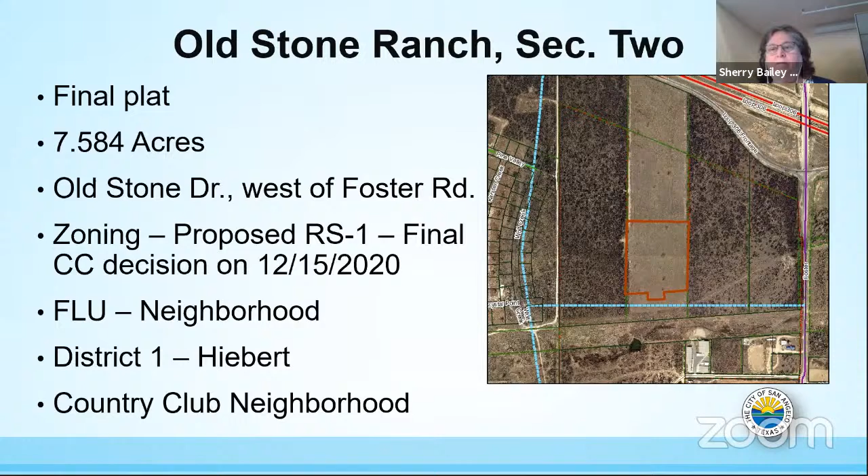There are 12 new lots that are being proposed along this section of Old Stone Drive. They are half-acre lots, and there are no variances being requested. The only discussion item that staff is aware of is the fact that what is being proposed is Old Stone Drive ending in a hammerhead.

In looking at the rationale for approval, the neighborhood designated in the comprehensive plan supports the single-family RS1 zoning which is proposed. The conformity with the intent and purpose statements: this provides the orderly, safe, and efficient development within the city. It also provides streets that ensure safe, convenient, and functional systems, and drainage access and utility easements are being provided. Staff is recommending approval of Old Stone Ranch Section 2 with 8 conditions of approval.

The first condition is a copy of the tax certification. Second, submit plans and construction improvements for Crystal Point Drive, or submit a financial guarantee or obtain a variance. Third, revise the plat to show the 60-foot right-of-way for Crystal Point for the entire length of the property, as it is a collector.

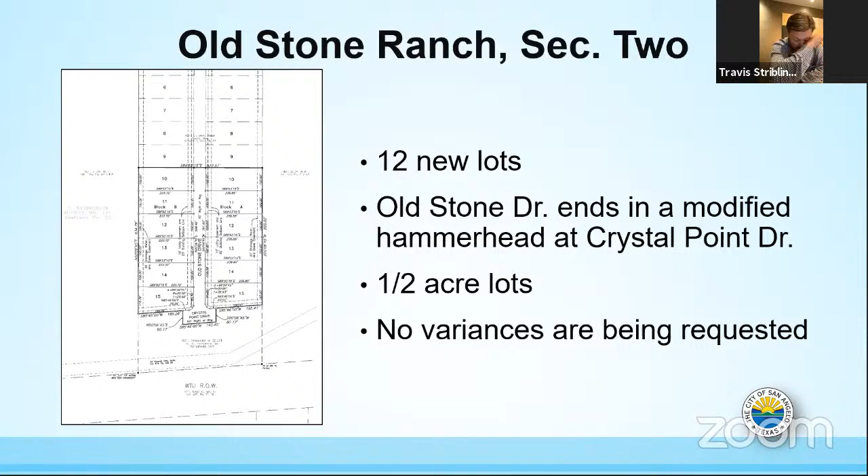I'm assuming if staff's recommending approval, the fire marshal has signed off on this hammerhead plat as it's been laid out. Is that correct? That is correct, and I believe the fire marshal is on as well if he has any additional comments.

Mitchell, have y'all discussed the option of a developer's agreement for the remaining Crystal Point? We have, and Public Works was hesitant to accept a developer's agreement in this case of right-of-way dedication and paving with no financial guarantee or backing, such as a bond, cash, or letter of credit. Normally that's stuff we'd see on a performance agreement. We were hesitant to accept it in this instance.

This is Shane Kelly, operations for the city. Another issue I have is I don't want to end up with another Twin Mountain Drive, where a section has been left out for years and years, and it's just a little bump out that actually starts causing safety issues in the roadway. That's why I had to go in there and temporarily construct a portion of Twin Mountain Drive, to clean up some of the safety issues involved.

It all depends on how soon things develop along Crystal Point Drive. But if this isn't dedicated and that half's not dedicated, you could end up with 2 chunks of Crystal Point coming together. So again, just another situation where we don't want to end up like Twin Mountain was for years out there.

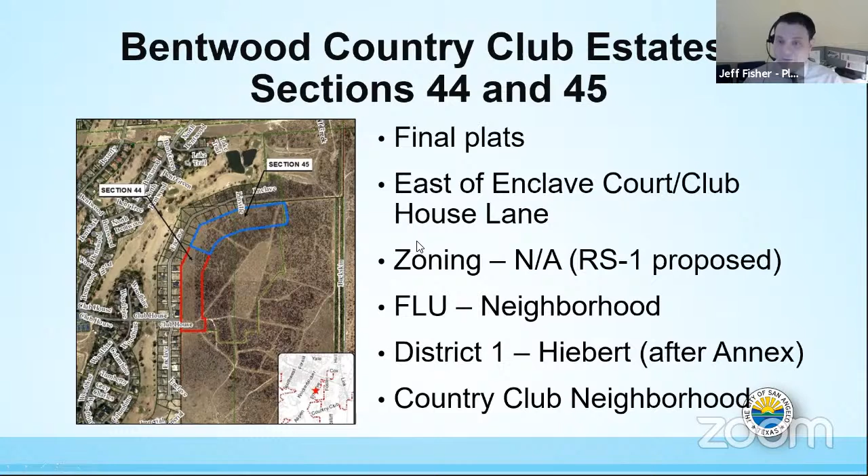This was part of the annexation item and rezoning that y'all looked at last month. So the zoning will be RS1 by tomorrow if everything goes well, and the future land use is neighborhood, District 1, Tommy Hiebert Country Club. This was the approved preliminary plat back in October. The areas we're talking about today, the two final plats, were the RS1 zoned areas to be annexed. So somewhere down the road, this remaining 49 acres will also be annexed, but not yet. So 44 is 8.051 acres, 33 single family lots, and 45 is 9.595 acres.

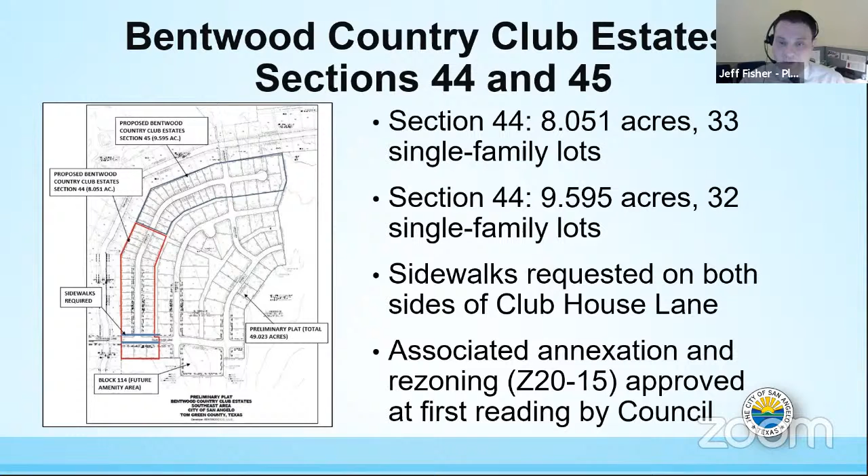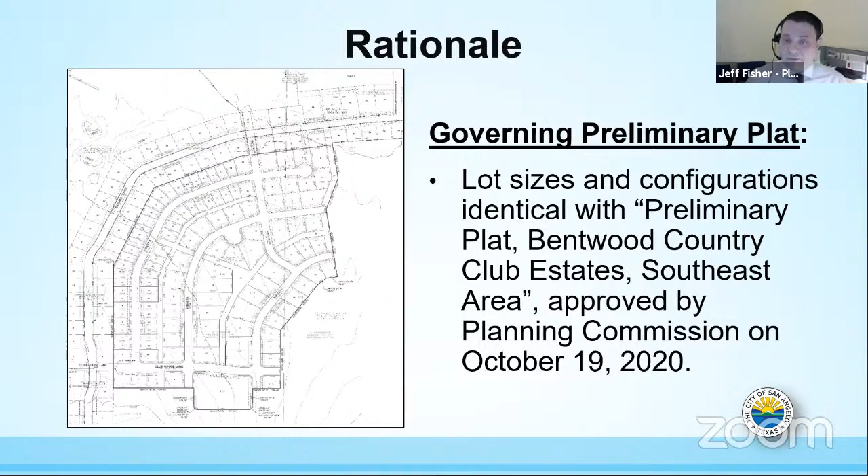I'll go over this quickly. The governing preliminary plat you all approved in October. The two final plats are the same lot size, identical with the preliminary plat, so it conforms.

The neighborhood policies support a diversity and mix of housing choices. These lots will range from 7,200 to 14,300 in that ballpark. So the lower end, some of the lots, will provide some options there, and then some of the larger lots.

As you go east, the new streets will meet the minimum construction standards. Clubhouse, as mentioned, is a collector, so that'll have a 50-foot paving width and a 60-foot right-of-way, and the other local streets will be 40 feet with a 50-foot right-of-way.

We've talked about this before as well with the preliminary plat. There could be a potential future amenity area here. So there's several reasons why we would want the sidewalks.

And again, this is just about 300 feet. So the dark red straight line is what's part of this plat. And then the dotted lines could be the future sidewalk extensions in the future. This could be an amenity area down here and just with more homes and people walking.

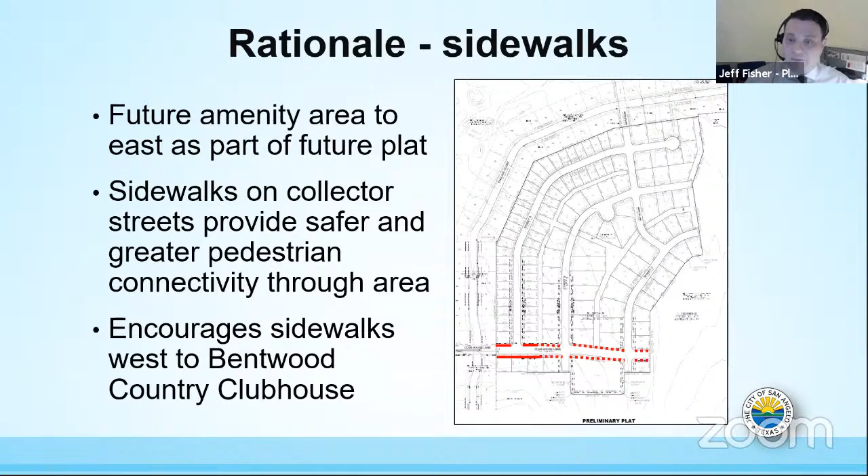We believe that with collector streets, having sidewalks is a good idea and will provide more pedestrian connectivity through the area. We've done this in previous plats. It also encourages more sidewalks in these dotted areas or in other places in the neighborhood.

Staff recommends approval of Bentwood Country Club Estates Section 44, subject to 9 conditions of approval, and approval of Bentwood Country Club Estates Section 45, subject to 8 conditions of approval.

I'll go over these quickly. For 44: tax certificate, and signatures of the preliminary plat. Some of those lettered lots on there were incorrect, and so basically some of the areas in the back that look like alleys might be used also as drainage features, so just label those.

The drainage study is required. Install water mains, sewer mains, and prepare and submit plans for Clubhouse Lane or variance. Prepare and submit plans for Riviera Lane or variance, and install the fire hydrants.

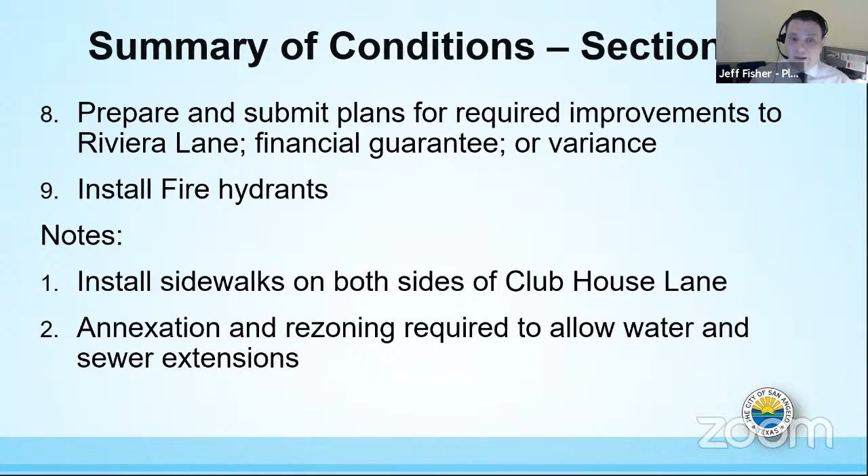A couple notes, we mentioned about the sidewalks on both sides of Clubhouse and the annexation and rezoning, which are going to second reading tomorrow.

And then for 45, it's mostly the same, except that those are not collector streets, so we're not asking for sidewalks there. So it'll just be the 8 conditions: tax certificate, signatures of preliminary plat, drainage study, water and sewer mains, provide and submit plans for Linville Lane, Riviera Lane, and fire hydrants.

So that concludes staff's presentation. I'm going to stop sharing my screen now, and if there's any questions or comments, please go ahead. Anyone have questions for the staff?

All right, I'm going to open it up for public comment. If you wish to speak on this case, please state your name. Hey, good morning, Russell with SKG.

We're not in opposition to really any of the conditions of approval, with the exception of the sidewalks on 2 sides of Clubhouse Lane. The sidewalk issue has been evolving. We've been there, and we don't have sidewalks in Bentwood now.

With some of these last plats, we do have a sidewalk coming down one side of Wolf Creek. We've kind of settled to that. Bentwood is a golf course community. They're primarily the mode of transportation. Yeah, there is some walking, but a lot of people use golf carts.

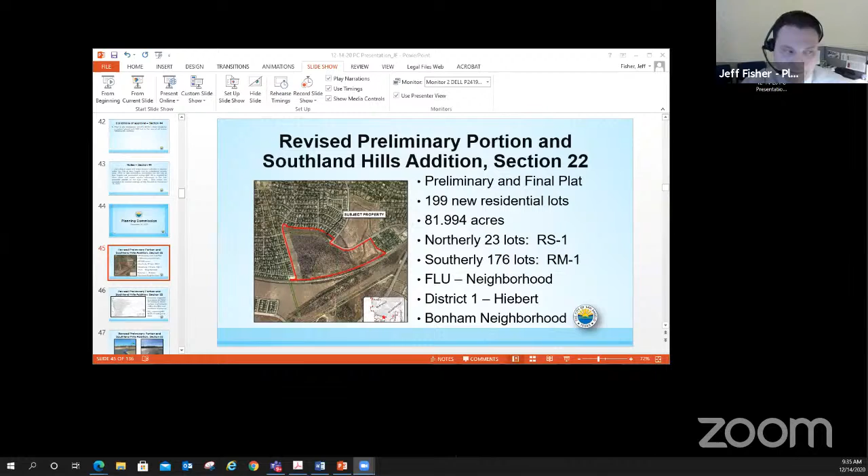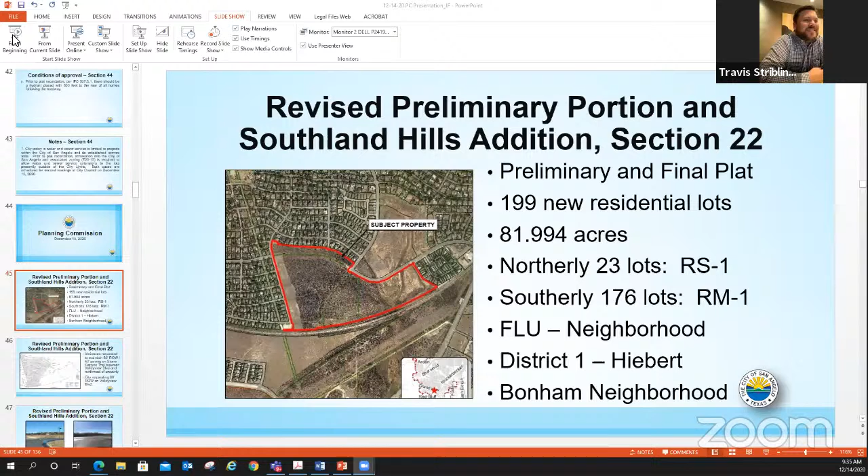Bear with me one moment, I'm going to share my screen again. There's pluses and minuses to having multiple screens. There it is. Okay, here we go.

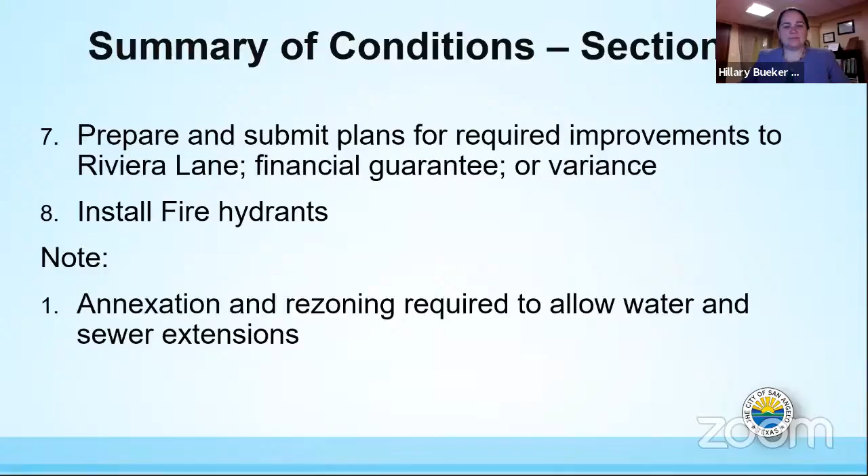Okay, so next case, and again we're going to combine them, y'all. This is a revised preliminary plat and a final plat for Southland Hills Addition, section 22. So the preliminary plat and the final are both for the same area. It's 199. Jeff, hold on. Travis, did you read the preliminary and the final? Go ahead. I'm not sure if I did. I'm so sorry, I didn't want to interrupt.

Yes, okay. Southland Hills Addition, section 22, a request for approval of a final plat, Southland Hills Addition, section 22, being 81.994 acres located east of Stone Canyon Trail and Valleyview Boulevard, and a variance from chapter 10.3A.1 of the Land Development and Subdivision Ordinance to maintain a right-of-way of 50 feet in lieu of the required 60 feet. And a variance from chapter 10.3A.2 to maintain a paving width of 40 feet in lieu of the required 50 feet for the portion of Stone Canyon Trail that is an urban collector street between the northwest corner of the property and Valleyview Boulevard.

Okay. Thank you, Chair Stripling.

The preliminary and final plats are both for 199 new residential lots across a large area of 81.994 acres. The northerly 23 lots, basically north of Valley View, are RS1 lots, so those will be single family.

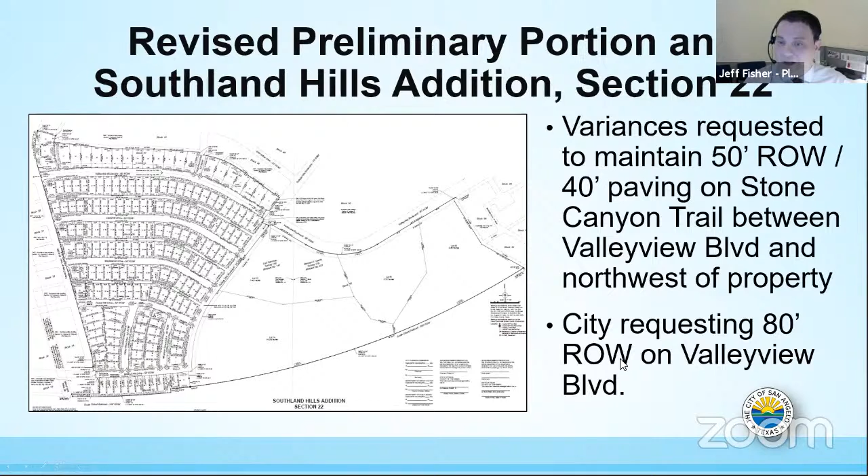A couple of variances were requested. There's a small piece of Stone Canyon shown as a collector street, even though it serves and always has served as a local road. So they requested a variance to allow this to remain at the local street construction standard from here to here: a right-of-way variance to maintain 50 feet and a paving variance to maintain 40 feet. The city is requesting an 80-foot right-of-way on Valleyview Boulevard here, and I'll explain that more in a minute.

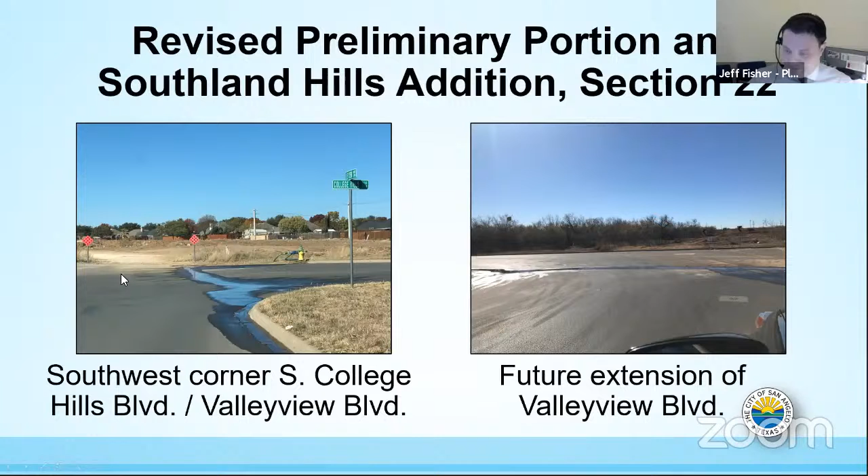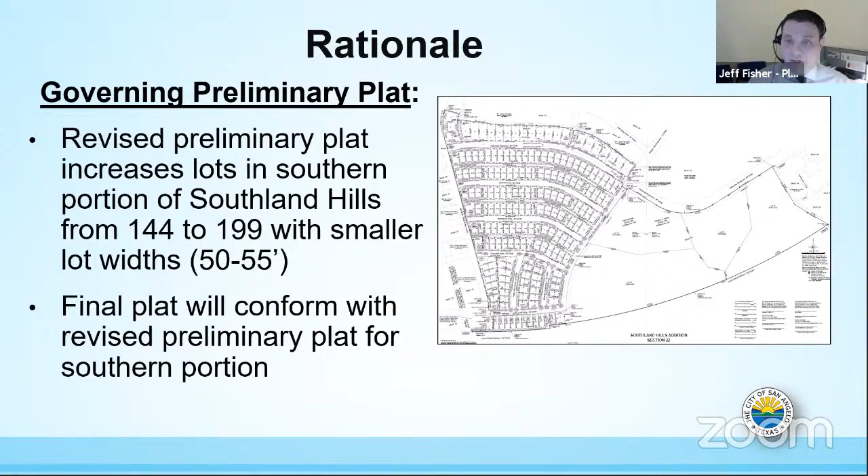Originally I counted 144 lots. These will be 199 lots with narrower lot widths of 50 to 55. The new preliminary plat and the final will conform with that.

The plats conform with the neighborhood policies to support a mix of housing choices, and the new street right-of-ways and paving will comply with construction standards. There's a lot of internal streets. Obviously this is a very big plat, but all the street standards will comply, with the exception of the variance.

Let's look at the 80-foot right-of-way first on Valleyview and why that's being required. You may have noticed in your staff report that it's designated in our thoroughfare plan as a collector street, so technically it only needs 60 feet. However, it's 80 feet to the west and 80 feet to the east, and I believe it's paved on one side to 80 feet already, so we are not asking for more paving, just the additional right-of-way.

That is something we discussed collectively with operations and engineering, and this would help operations for further maintenance of that right-of-way if they ever need to get in there, and also if the city down the road ever needs to widen that street in the future, we'd be able to do that. There's a section in chapter 10.3 of the subdivision ordinance that gives us the authority in those cases even if it's designated as a collector, and again, that's up to y'all.

Secondly, on the sidewalks on Valleyview, similar to the previous case, we believe that's a collector street. This is a really large subdivision with 199 lots, so having some sidewalks there would allow more pedestrian connectivity in the area, and again our standard policy is to have them on both sides.

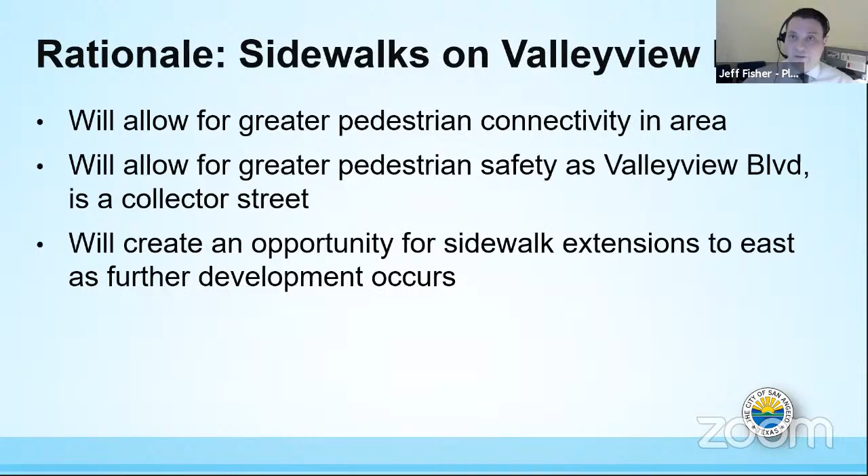When you hit College Hills to the east, the subdivision plat boundary is only on the south end as you go east of College Hills. So it's on both sides of Valleyview, and then east of College Hills, just on the south side, the portion that's abutting the plat.

We're definitely in support of the variance on Stone Canyon Trail. I went back over and looked at previous phases of all the subdivisions going back to 1978 and onward. It was constructed as a local road. The thoroughfare plan came in years later and wanted it to be a collector, but that area really serves as a local road, and it would require them to rip up the curb and gutter. So we are in support of the variance for Stone Canyon for that piece to stay at 50 feet. That makes sense because as you go further down in the subdivision, it stays as a local road—it's only that one section that was a collector. So we're in support of that variance.

Staff recommends approval of the revised preliminary portion, Southland Hills Addition, subject to 3 conditions of approval. Approval of Southland Hills Addition Section 22, the final plat. Approval of a variance to maintain 50 feet right-of-way for Stone Canyon, 40 feet of paving width for Stone Canyon, subject to 19 conditions of approval. I'll go over these as quick as I can.

Preliminary plat: revise the plat name, that's just to be consistent with the original approved plat and to show some differentiation. Again, minor thing, we can work with the applicant. Revise the plat for 80 feet of right-of-way on Valleyview Boulevard—that's if you all want to support that decision or not—and install fire hydrants.

And then the final plat: tax certificate, obtain the signatures on the preliminary plat first, which they'll do, obtain approval of a right-of-way abandonment. And that's, again, the plat was based on a 60-foot right-of-way, so if we change that, then that condition might change.

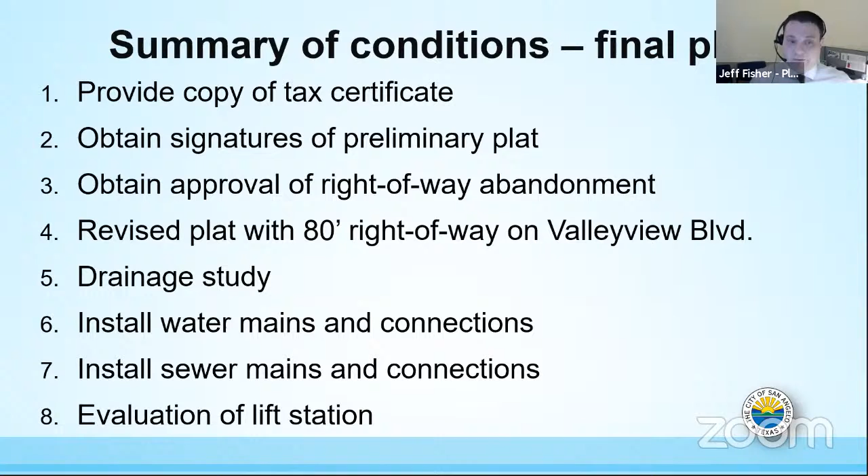Revise the plat with the 80-foot right-of-way, a drainage study, water and sewer mains, an evaluation of a lift station—engineering can comment more on that if needed—and then prepare and submit plans for all of the streets. I'm not going to go over all of these conditions, just know that with the exception of Valleyview and that portion of Stone Canyon, all of them are going to be local streets. They're going to construct them at, I'm assuming, 40 feet and not going to require a variance on those.

Okay, so I'm going to stop sharing my screen, and that concludes our presentation.

Anyone have questions for the staff? All right, I'm going to open it up for public comment.

This is Erica Carter with Carter Centris Engineering. I have Blake Whitley here and Lance Lacey. We have no issue with what was presented other than the 80 feet of right-of-way in lieu of the 60 feet. So I'm going to let Blake and Lance take over and give their spiel.

Blake? Are you there, Blake? I see Blake's name, Erica, but did Blake have a phone number as well? Was he calling in like you did? I don't know. Lance, are you there? Oh, good grief—I'm just unmuted. Okay, Lance, why don't you go while I try to get a hold of Blake?

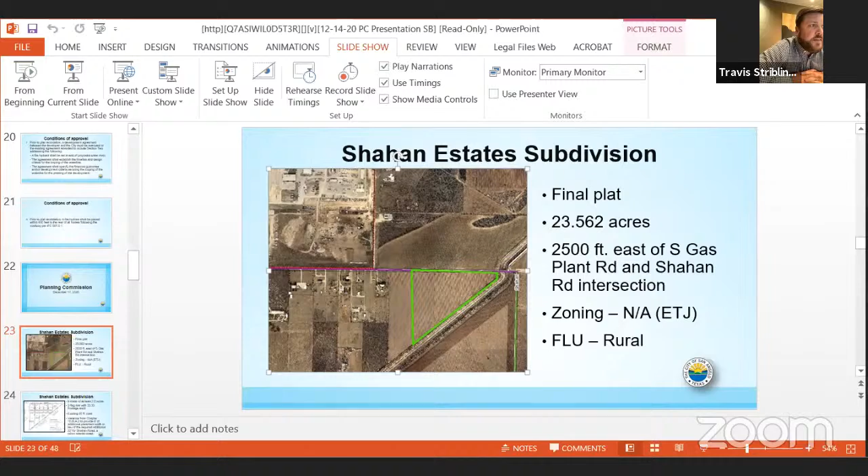All right, final plat for Shahan Estate subdivision, a request for approval of a final plat for Shahan Estate subdivision, being 23.562 acres located 2,500 feet east of the intersection of South Gas Plant Road and Shahan Road, and a variance from Chapter 10.3A2 of the Land Development Subdivision Ordinance to provide 6 feet pavement width in lieu of the required 22 feet for Shahan Road, a minor arterial street.

Okay, this is Hillary Bueker, Principal Planner once again. I've lost my PowerPoint, so I ask that you bear with me for just a minute. No problem. I totally lost it.

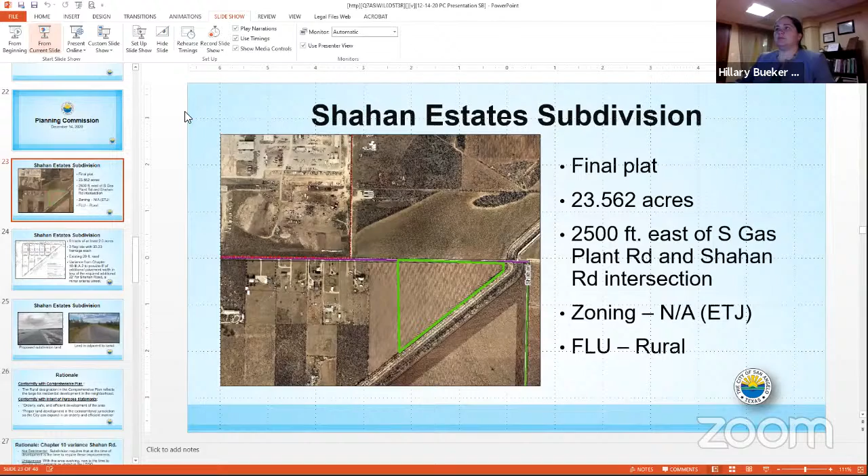I'm going to start. So this is a final plat of approximately 23, a little over 23 and a half acres. We are about 2,500 feet east of Gas Plant Road and Shahan Road, which would be kind of off your image to the left here. The zoning is actually not applicable since we are in the ETJ.

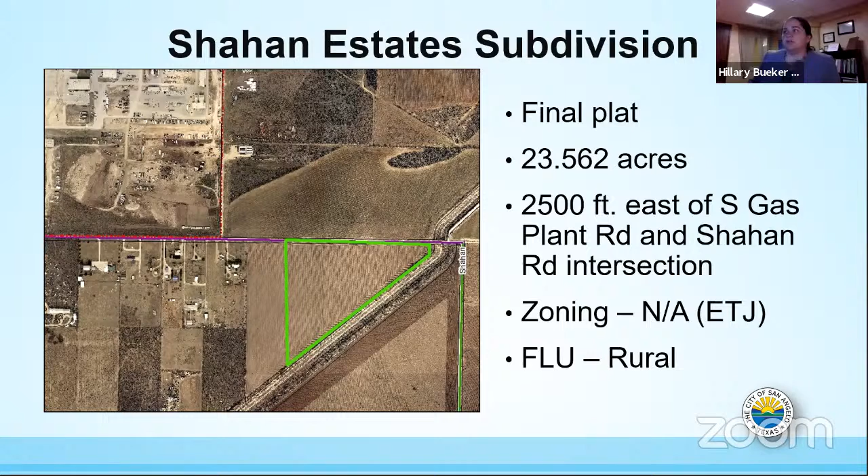If you see this red dashed line along here, that is the current city limit line. So we're not too far off, but we are in the ETJ, and the current future land use is designated as rural. Shahan Estates, I think all of them are over 2 acres, but they're larger lots in the ETJ. So we're looking at 9 lots of at least 2 acres. We have 3 flag lots, and each of the flags have at least 33 feet on the frontage.

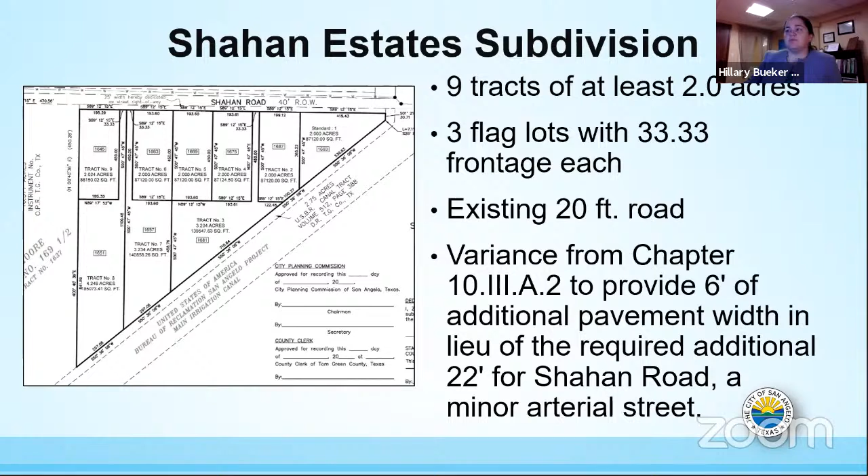There is the existing 25 or 20-foot paved section of Shahan Road. They're asking for a variance from the paving width. Shahan Road is actually designated as an arterial, which would require a 64-foot paving width. Currently, with it being 20, they would be required half of the 44, which would be 22. So they are asking to pave 6 foot, making it a minimum 26-foot wide road in lieu of the required 22 feet for the arterial.

So with chapter 10, staff is not supporting the variance. We're going to go through some of this. Again, we are basing this decision off of the current ordinance, and the ordinance states that any development is required to pave half of the incremental width. So the subdivision ordinance does say at the time of platting, that's when the roadway improvements are triggered. Staff does understand this is a pretty large section being 22 feet, but again, the subdivision ordinance triggers this with the plat.

With this area evolving, we're not sure that this isn't the time to get these improvements. We don't know if this will spur future development, and allowing the variance now might prohibit that arterial from developing in the future. We see no current hardship. There's no topographic issues. The master thoroughfare plan states this is a future arterial, so that's what we're basing it off of. And each home might not create significant traffic, but as this area develops out, this road may be needed in the future.

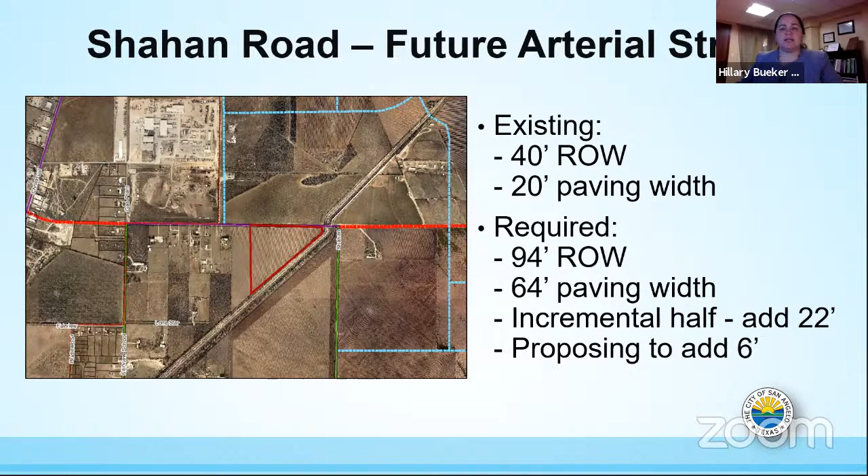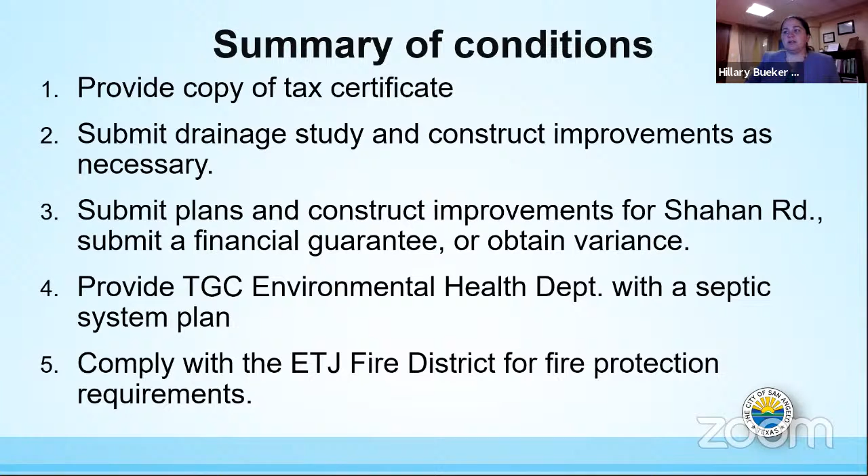So they're proposing to add 6 to meet that minimum. Staff is recommending approval of Shahan Estate subject to 5 conditions and denial of the variance for the 6 in lieu of the 22. So the summary of conditions are a copy of the tax certificate, the drainage study, Shahan Road, submit a financial guarantee or get a variance. We need to provide Tom Green County Environmental Health with the septic system plans, and we must comply with any fire district requirements for the ETJ. Does anyone have any questions?

Anyone have questions for the staff? Okay, I'm going to open it up for public comment.

Real quick, the property owner wanted to give his thoughts on it, but I did want to state that we didn't come up with 6 foot on our own. That was proposed to us. We've had many meetings about this, and we only found out last week that they weren't going to support this 6 foot. So we didn't come up with the 6 foot, that was given to us by some of the staff. I guess it didn't get passed down the line or whatever, but that's kind of where we stand and how we're trying to rush and get things the way that we need to have them.

So, Wes, are you on the line? Yeah, I'm here. Okay, go ahead.

Yeah, my name is Wes Quinn. I recently purchased this property with another partner. I'm going to be building my house on the western portion of this property, and our whole intent was to be able to have 4-H and FFA livestock projects. Where my current subdivision is, they don't allow any of that. For the eastern portion, for this plat, we're wanting to have that same feel, that same vision, to have larger properties that will facilitate the 4-H and FFA projects for the youth.

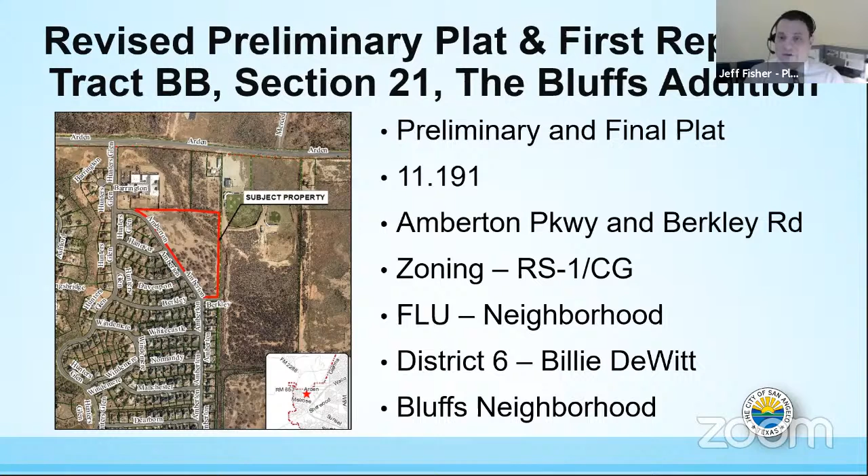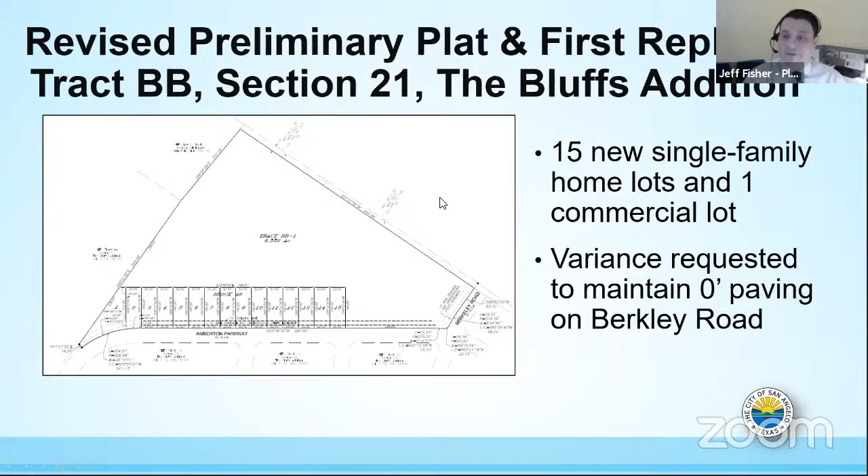This is District 6, Billie DeWitt in the Bluffs neighborhood. The 15 new single family homes are north of Amberton Parkway. There's a section of Berkley Road that was never developed but shows as a right of way. As part of the plat, that triggers the incremental half on Berkley, with a minimum of 26 feet. Since it's a dead end here and goes into an ASU property, they're asking to leave that at 0 feet, while the city is asking for 26 feet on the variance.

This is looking again at where Berkley dead ends. I've talked to ASU. There's no plans right now to develop behind there, but there's always a chance they could sell that land or change their mind, and the city might want to have that access. Leaving it at 0 feet might just create an issue, and the city would have to come in and pave that. So we're against the variance based on that.

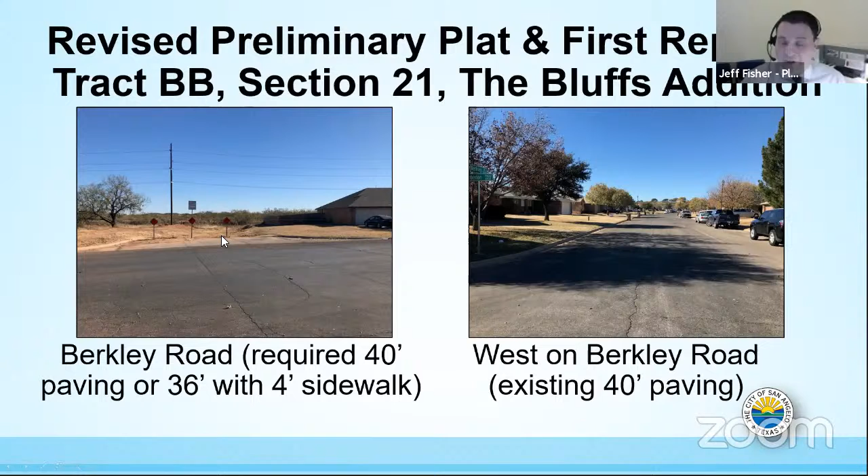Otherwise, no issues. We received one notice in favor, in the Green Star. Because this is a replat and a portion is RS1, we did circulate notices. Out of the 28 notices, there's one in favor. The one against was actually in support of the plat and, in a sense, in support of the variance too. Her issue was drainage - she doesn't want Berkley to be paved, which is the applicant's position, so she's opposed to improving Berkley, essentially taking the same side as the applicant. She lives up on Davenport and was concerned about drainage, but engineering is here to comment on that if it comes up.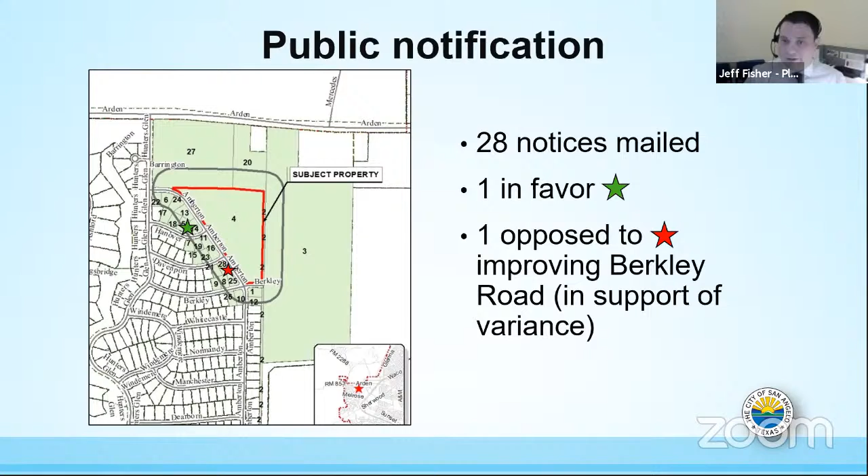We do have a drainage study as a condition of approval, which is standard and should address that street. The final plat will conform with the revised preliminary plat for the same area we're looking at. The plat conforms with neighborhood policies to support a mix of housing choices. The commercial lot in the back isn't consistent with the neighborhood designation, but it was already zoned CG before, so we believe in general it conforms. As for intent and purpose statements, Amberton already has sufficient right-of-way and paving width. The only issue is the street width on Berkeley, which was never developed.

We are recommending denial on the variance for Berkeley, given the potential that it could be developed to the east one day. If we miss that opportunity, the city would have to come in and do that later. Dead end streets aren't unique to the city - we have a lot of them, and we've had cases today where they're required to pave to the end or provide a hammerhead, so this wouldn't be any different. There wouldn't be any hardship, since all the streets in the area are already fully paved with curb and gutter - those developers had done that with their subdivisions. This would be the only piece left that wouldn't be. Again, for general safety, when lots develop adjacent to a street, having that required paving width for fire and public safety is important.

Staff recommends approval of a revised preliminary plat, section 21, the Bluffs Addition, and approval of a first replat of tract BB, section 21 of the Bluffs Addition, and denial of the variance to maintain 0 feet of paving without curb and gutter for Berkeley Road, thereby requiring the 26 feet, subject to the 6 conditions in your staff report.

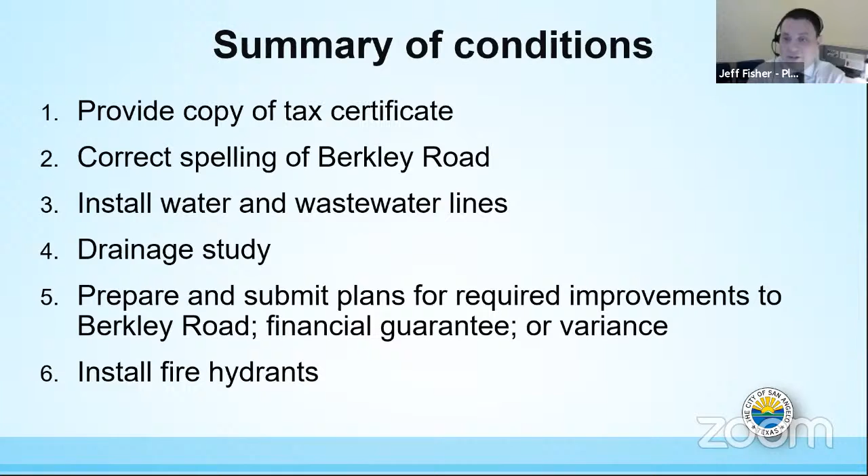That was the tax certificate, correcting the spelling on Berkeley Road - it should just be BERKLEY. Other conditions include installing the water and wastewater lines, a drainage study, preparing and submitting plans for the required improvements of Berkeley or a financial guarantee or the variance, and installing the fire hydrants. Just some notes - there may be some additional floodplain requirements, since that east part of the lot that's zoned commercial is in the portion of the floodway.

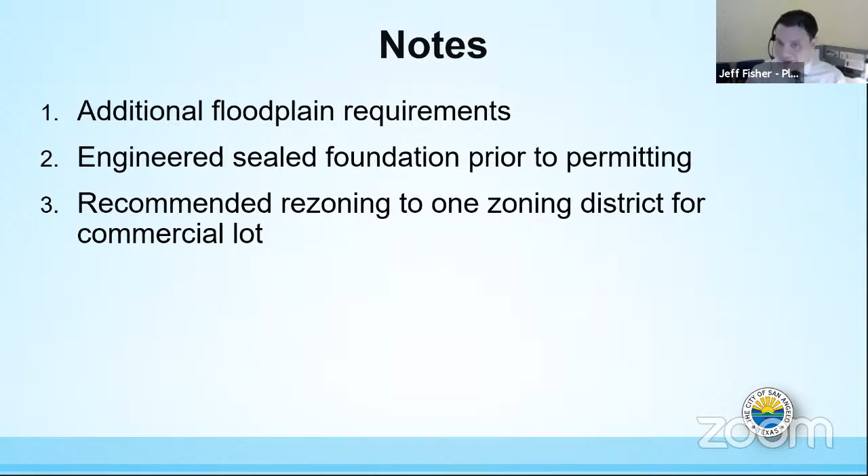Engineered sealed foundation prior to permitting, and we recommended rezoning to one zoning district for the commercial lot. Just that front part is RS1, and the back is commercial. So if they ever put a small retail plaza in there, you've got potentially some compatibility issues with that little piece in the front, depending on where they're locating their buildings. But again, that's up to the applicant.

This concludes staff's presentation. Any questions or comments?

Well, I'd like to add something, if you'd allow me. Let me talk about the reason for denial of the variance from the staff perspective. We are approving a preliminary plat, and they are right now proposing to add the homes and not do anything with the commercial lot. That was their proposal today. So our suggestion was to final plat the residential lots and leave the big commercial lot preliminarily platted. Again, we're approving that today. And then we will defer the requirements for Berkeley for another day, because I don't think it needs to be paved today. There's nothing that it connects to, but at the same time, if we are final platting that commercial tract, now is the time to get the road.

So if we final plat it today and give them a zero-foot variance, and all of a sudden we develop homes or businesses to the east, now that developer and/or the city is going to have the obligation that should have fallen on this section of the bluffs. So I hope everyone understands the way staff was looking at it. If we're good with approving the preliminary plat and final platting the residential lots, that's great. My concern was if we final plat the commercial, have a buildable lot there, and don't do Berkeley with that at the same time, then we run into problems later.

So I hope... well, the picture of Berkeley looks like it's a natural drainage right now. It looks like it's draining and going naturally. Sure, and we actually talked about the pavement. If there was pavement, the pavement could actually speed up the water to get out of there faster. The lady was talking about some of the drainage being an issue. Paving this may actually speed that up and get it to the right-of-way quicker. So just another thing to consider.

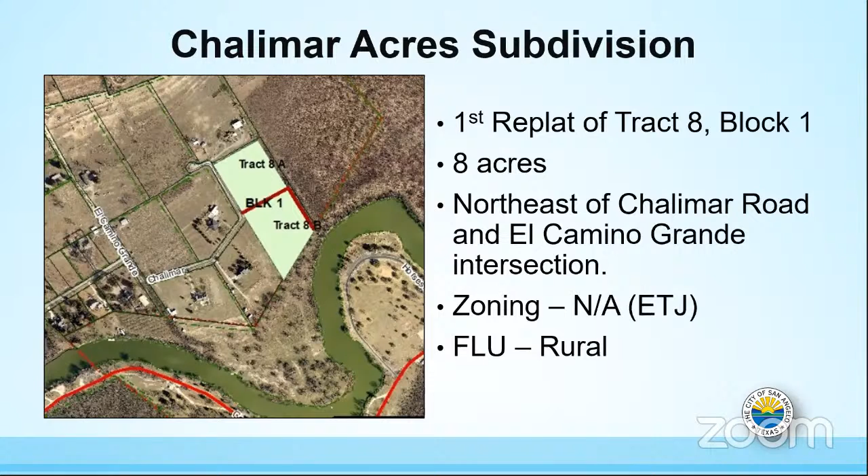This is, as you indicated, the first replat of Tract 8, Block 1. It's an 8-acre tract, northeast of Chalimar Road. There is no zoning because this is in the extraterritorial jurisdiction, the ETJ, but the future land use for this area does have it as rural.

If you go out on the road, it's larger towards what I would consider this side of the area, and then it starts to taper down as you get in towards the end and the cul-de-sac at the very end of Chalimar.

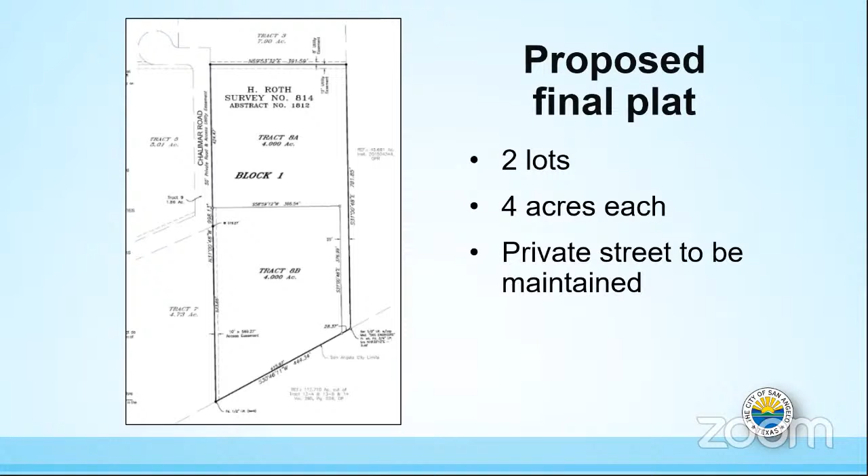The proposed plat before you is to make 2 4-acre lots out of this 1 8-acre tract. There is a small flag which brings it down so that they have access to the city-owned property that's immediately adjacent to the river, because there is an agreement for access and use with that city-owned property.

We sent out 7 notices on November 25th, and late Friday and then again on Saturday we ended up receiving a number of notices. There are 2 that are within 200 feet, and the remaining notices are outside of that 200 feet. I called and talked to 2 people. One was under the misunderstanding that there was a large number of lots that were actually going to be developed on this tract, and they were extremely concerned, as was everybody who had sent in the petition, about the water, particularly in this area, given that number of lots.

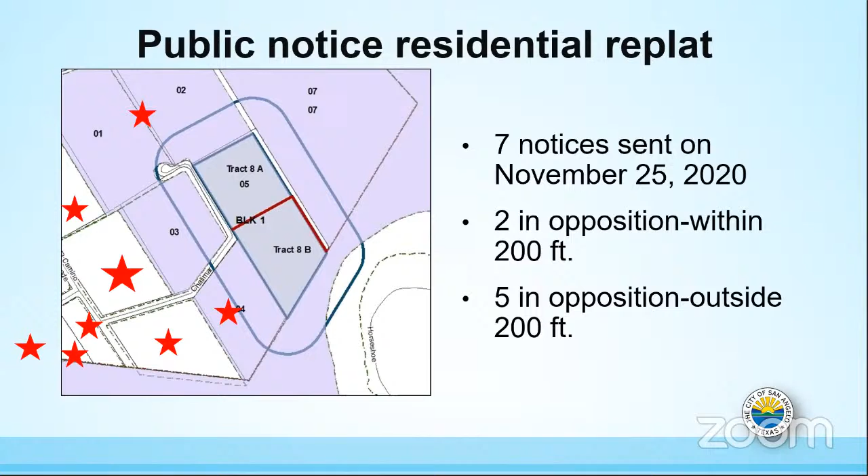I told them that only what was being proposed were 2 4-acre lots, and they seemed to be okay with that. The other person simply just did not want the division of the 8-acre tract into the 2 4-acre tracts.

The rationale for the approval of the plat before you is the future land use in this area has the area as rural. The 2 4-acre lots that are being proposed are consistent with rural standards, particularly in this case because they're both on wells and septic systems, so they would be restricted in size anyway. And the existing deed allows only division down to 2 1/4 acres, and this 4-acre size certainly complies with that.

The conformity with intent and purpose statements: the plat will provide for the orderly, safe, and efficient development of the city. We encourage platting at all times, particularly in the ETJ, and it does provide a systematic and accurate record of land development.

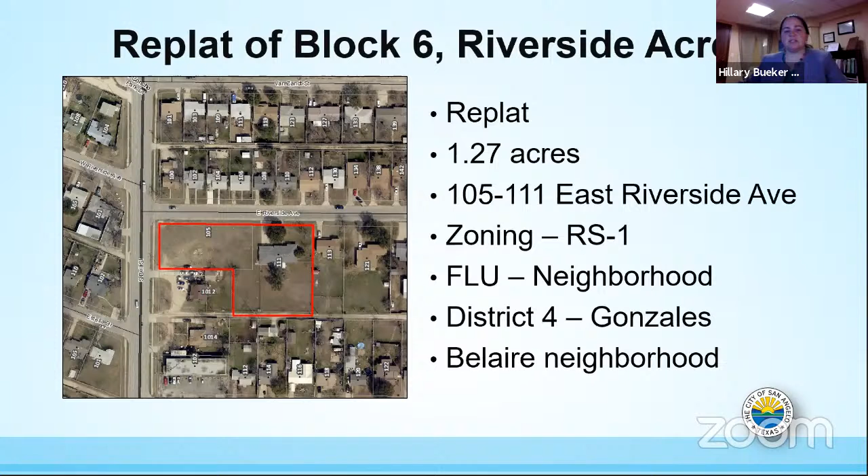All right, good morning Planning Commission. This will be my first case. Again, Hillary Bueker, Planning Manager for the City of San Angelo. So we are looking at the replat of Block 6, Riverside Acres. It is a replat of a little over an acre, 1.27 acres. It is currently addressed 105 through 111 East Riverside. If the plat's approved, I'm sure those will minorly change. The current zoning is RS1 with a future land use of neighborhood. It's in SMD number 4, Lucy Gonzales's district, in the Belaire neighborhood.

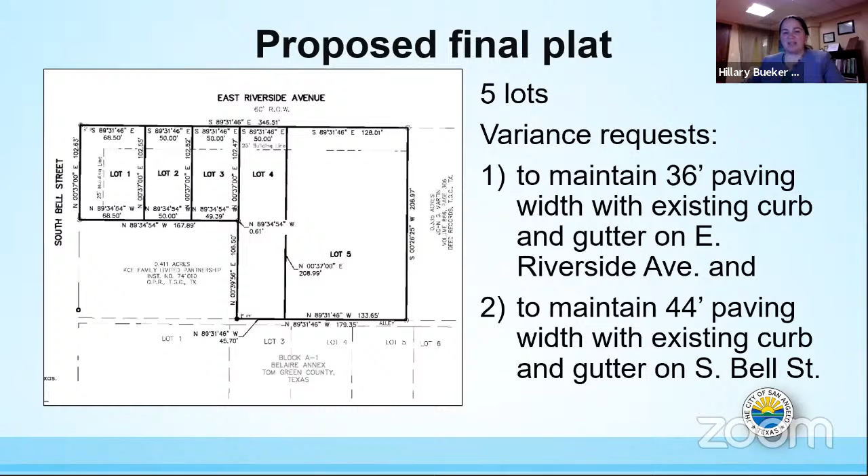So as you can see, they're proposing to add basically 5 lots total. There were 2 currently, so they'll be adding 3. There are variance requests to maintain 36 feet of paving width on East Riverside Avenue, designated as a collector on the current master thoroughfare plan, and to maintain 44 feet of paving width on South Bell Street. So the plat itself does conform to the comprehensive plan. The RS1 zoning is consistent with the neighborhood, as this is really a continuation of the existing development over there. As you look in the area, there's a lot of single family homes on that side. It also will provide for orderly, safe, and efficient development of the city, and will provide streets that ensure safe and convenient circulation.

So let's talk about the 2 variances from Chapter 10.3A2. They are the paving width variances. Staff is actually recommending approval on both of these for different reasons. The current streets meet the need of the area. Adding 4 additional homes will not significantly increase the traffic. South Bell Street was improved to its current width, I believe, in 2012.

I'll have to go back and look at the exact dates, but recently the city was the one that determined that width. So that's the reason we've supported variances on South Bell Street.

Also, this section of East Riverside, although it's a collector on the master thoroughfare plan, is very much developed out. As we look through these, I'll show you some pictures, and you can see this development will not significantly increase that. These streets are within a fully developed area and maintain the same widths adjacent to the plat. The streets serve the area, currently have curb and gutter, and 4 homes will not increase the strain on these streets. This width is sufficient and will not pose a safety risk.

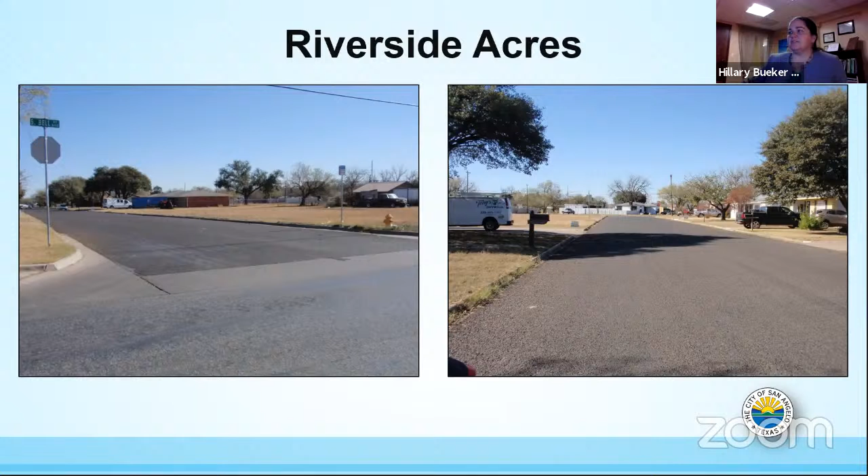So again, this is the area of Riverside. You can see all homes all around it. This is the subject property you're seeing on the left-hand side picture, and it is on the right. You can see the current home is being remodeled, and the right picture is looking back toward Bell Street. Very nice, has been recently retopped. You can see, even though it's 36 feet, it's very wide and can accommodate parking as you go along.

So staff is recommending approval of the replat of Block 6 Riverside Acres and approval of a variance to maintain 36-foot wide paving for East Riverside, as well as approval of a variance to allow 44-foot paving width on South Bell Street, subject to 5 conditions.

The first is a copy of the tax cert. Second, to improve Bell Street, submit a financial guarantee or obtain the variances requested. Third, submit plans and construct the improvements for East Riverside, submit a financial guarantee or obtain the variance as requested. There are some improvements to sewer that need to be done, so that's condition 4. Condition 5 is just a clerical matter—they did not write the right-of-way for South Bell Street, so they'll need to notate that on the plans.

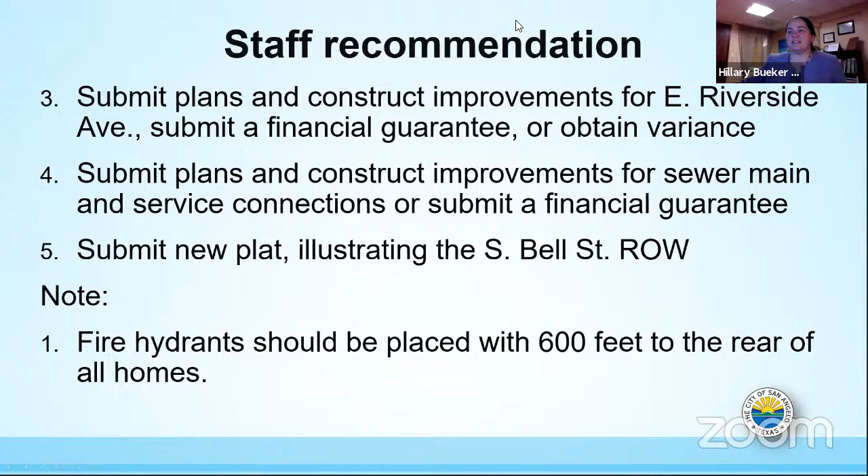The final note is that fire hydrants must be placed within 600 feet, so as they look to build these homes, they'll have to look at those fire hydrant requirements and see if they need to do anything else. That is the end of staff's presentation. Does anyone have any questions for me?

Great. We're going to open it for public comment.

Good afternoon, Erica Carter with Carter Fentress Engineering. I first want to say thank you to Hillary and the staff—not just on this one, on all of them. I know they've been working very diligently the past 2 weeks to get these on the agenda. I have no issue with any of the presentation, so I ask that you approve as presented.

Thank you, Erica. Is there any further public comment? Seeing none, we'll close public comment and open up for the commission.

This one seems pretty cut and dry compared to the rest of them. I'll go ahead and vote for approval. Okay, we have a motion to approve as presented. Second. Okay, we have a second. Any discussion? All those in favor say aye with a show of your hand. Any opposed? I show 5-0 on that one.

Thank you for one easy one today, Hillary. Somehow I got the easy one, so hopefully these next couple are going to fly by. So are they yours also? Yes. Okay, we'll expect easy. Thank you.

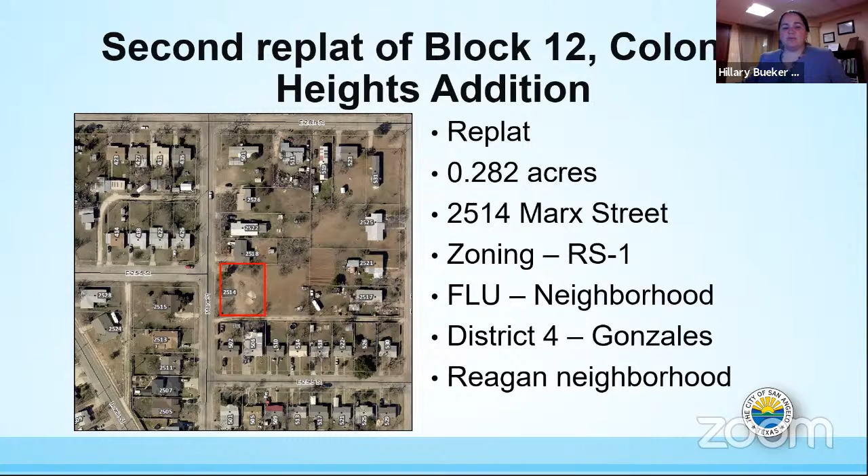The current zoning is RS1, with neighborhood future land use. We are in SMD number 4, Lucy Gonzales's district, in the Reagan neighborhood. This is a proposed final plat creating 2 lots, a good infill project. They are requesting a variance to maintain 36-foot paving width with existing curb and gutter on Marx.

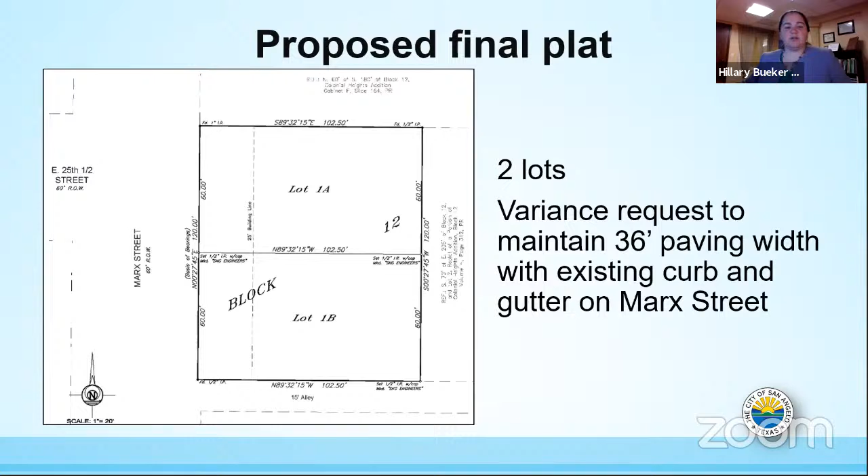This plat does conform. It is RS1 zoning, consistent with the neighborhood future land use, and it's a continuation of the existing development. The plat provides for orderly, safe, and efficient development of the city, with streets that are safe, convenient, and functional for circulation. So we are recommending approval of the plat and the Chapter 10 variance.

The current road meets the needs of the area. We're only adding 2 new homes, so that will not significantly increase traffic. The streets are within a fully developed area and maintain the same widths adjacent to the plat. They serve the area and currently have curb and gutters, so 2 homes will not create strain on the streets, and the width is sufficient and poses no safety risk.

Staff is recommending approval of the second replat of Block 12 Colonial Heights Addition, and approval of the variance request from 10382 to maintain 36-foot paving width from Marx, subject to 3 conditions: a copy of the tax cert, improve Marx, submit a financial guarantee or get the variance as they have requested, and install water and sewer service lines to each lot.

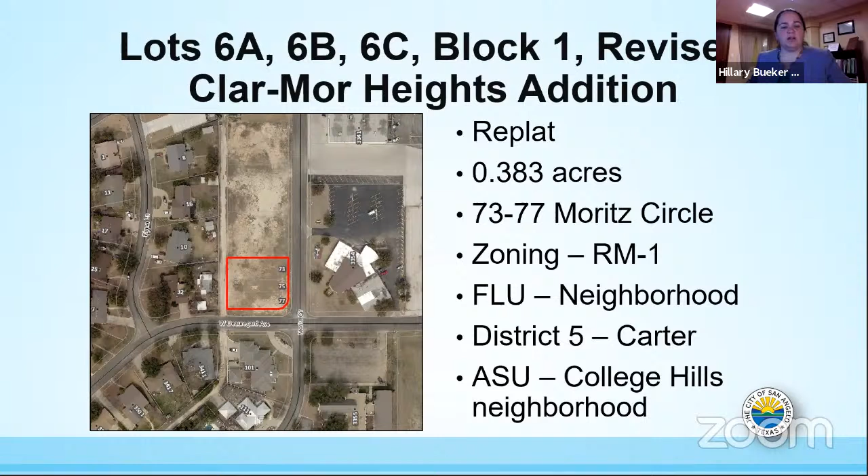Okay, this is mine as well, so we're going to go through this one hopefully relatively quickly. This is lots 6A, 6B, and 6C, Block 1, revised Clar-Mor Heights Addition. We're looking at a replat of 0.383 acres. The current addresses are 73 through 77 Moritz Circle. This is zoned RM1 with future land use of neighborhood, SMD number 5, Lane Carter, in the ASU College Hills neighborhood. They're looking at doing 3 townhome lots.

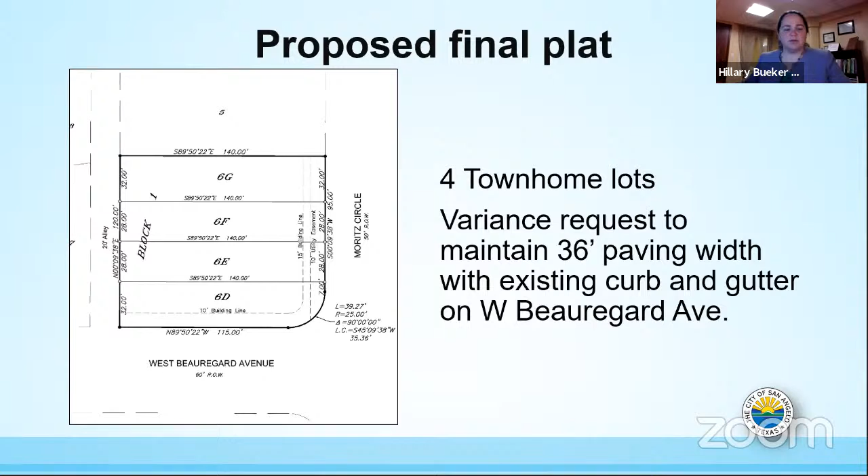So they may look skinny to you, but that is on purpose. They're also requesting a variance to maintain 36-foot wide paving width with curb and gutter on West Beauregard. Just so you're aware, Moritz Circle is currently 36 as well, but the applicant has agreed to do sidewalks in front of their townhomes. So we are appreciative of that.

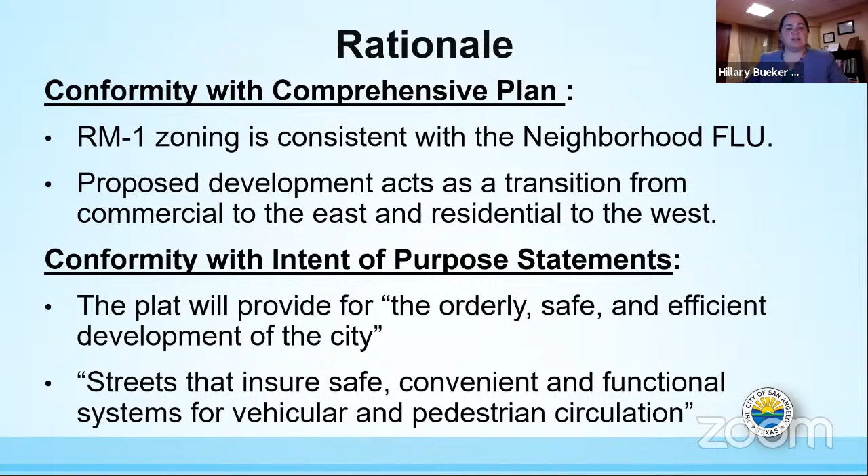This is RM1 zoning, which is consistent with the neighborhood future land use. The development will act as a transition from the commercial—HEB is to the east, with some commercial development there—and the RS1 residential to the west. This will provide for orderly, safe, and efficient development, and streets that ensure safe, convenient, and functional pedestrian and vehicular circulation. Moritz Circle is actually 36 foot wide, but they're going to put a sidewalk on that one, so this variance is strictly for West Beauregard.

Again, the street meets the needs of the area. We're adding 4 new homes, which should not increase traffic significantly. They are within a fully developed area with the same widths. The streets serve the area, and again, 4 new homes will not create a significant amount of new traffic.

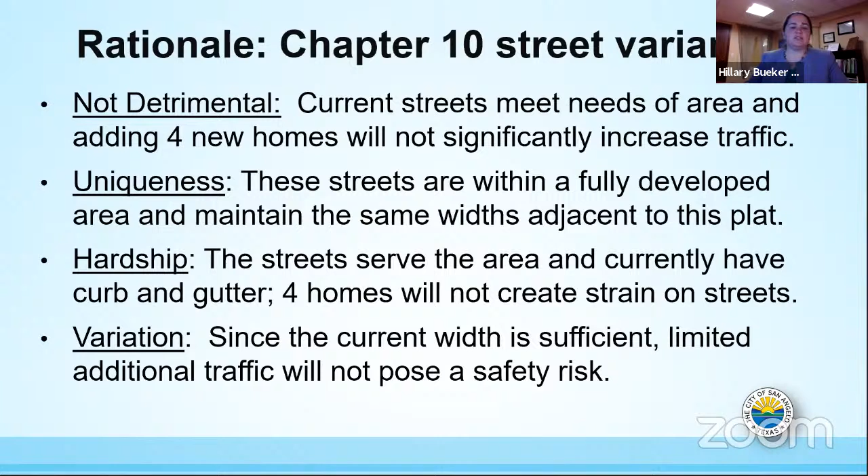Staff is recommending approval of the replat of lots 6A, 6B, and 6C in block 1 of the revised Claremore Heights edition, and approval of the variance from chapter 103A2 to maintain a 36-foot wide pavement width for West Beauregard, subject to 3 conditions.

We need a copy of the tax certificate. We need to improve Moritz Circle with a financial guarantee or submit a variance. Again, they have agreed to do the sidewalk, which is a great asset for this area, and then submit the improvements for West Beauregard, financial guarantee, or a variance, and they have asked for a variance on West Beauregard.

So with that, I will stop sharing my screen and ask for questions.

Henry, could you please clarify how we need to do the motion? Because the variance would be for Beauregard, but for Moritz, it's going to be improved to city standard, because with the sidewalk, that's part of the 103A2 city standard. So it will be 36 foot with a 4-foot sidewalk.

So can that one be deferred for the sidewalk to the building permitting stage, as we've done in the past for residential? I have not considered that. That was not even a thought because it was part of the street standard.

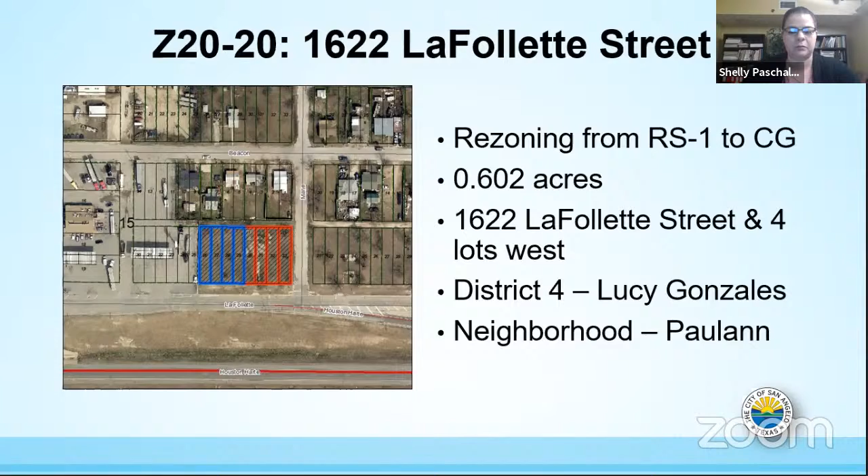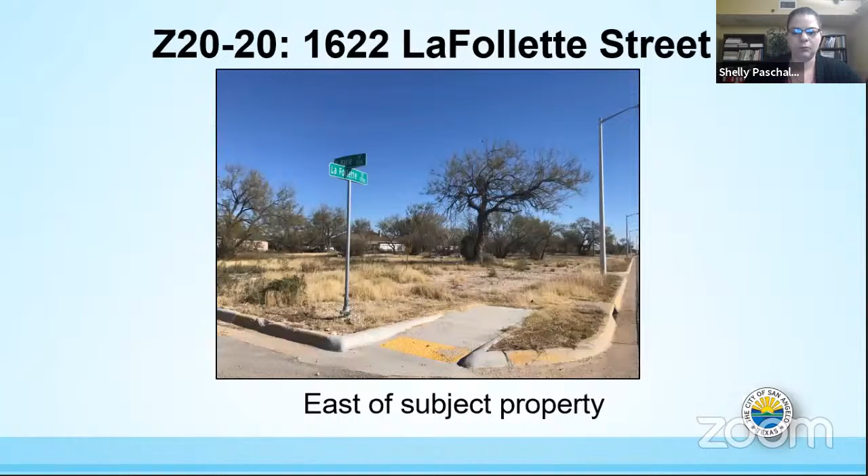I did send out 15 notifications. I did not receive any in favor nor opposition.

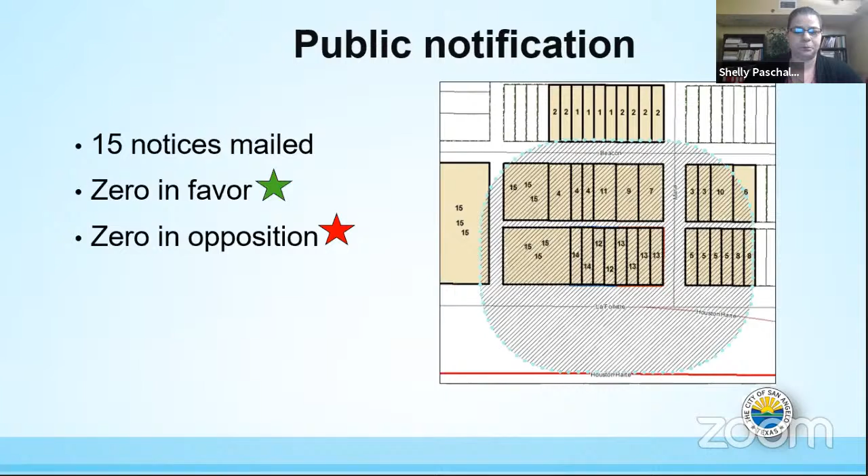We do believe it's compatible with the plans and policies. The proposed general commercial is consistent with the commercial future land use. One of the goals is to create single use centers centering around large retail and office clusters that are visible from major frontage roads, which Houston Harte is a large street in our town. The subject property directly fronts onto this access road of the loop.

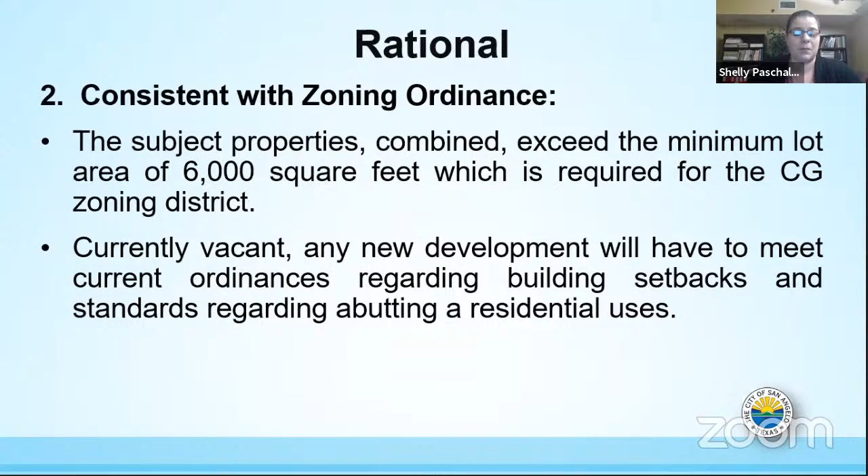We do believe that it's consistent with the zoning ordinance. The combined lots exceed the 6,000 square feet required for general commercial. Currently the property is vacant, and it would allow new development to come in. They would have to meet the standards of that zoning ordinance, both the setbacks and regulations regarding abutting a residential use. It is compatible with the surrounding area.

This area is both commercial and residential, so it would extend the development pattern for this area. These properties have been zoned residential since before the construction of Houston Harte Expressway. Before construction of that freeway, this area could have been suitable for residential. However, since the addition of that freeway, it does change the character of these properties and the surrounding properties. The rezoning would be consistent with the future land use in the existing adjacent mixed use in the area.

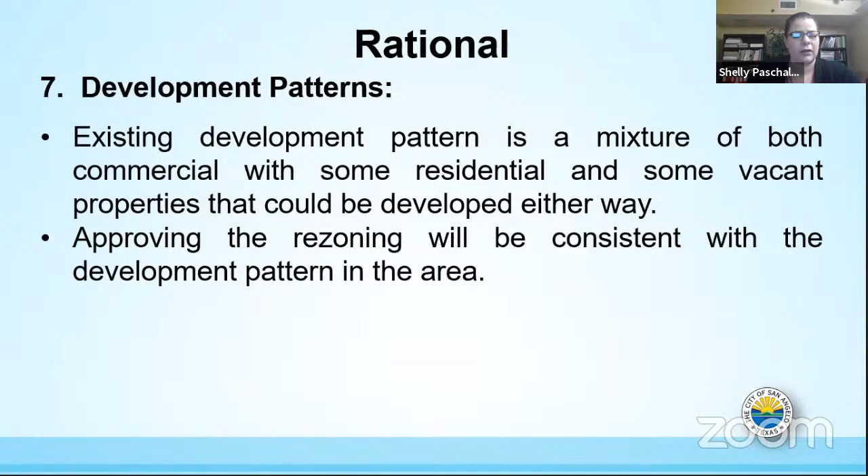We do not anticipate any impacts on the natural environment. However, there are impacts that could potentially happen during development of any kind of commercial property, building, or structure. We do believe that a rezoning to CG will allow more commercial development, which San Angelo needs. As I stated, the development pattern in this area is both commercial and residential, with some vacant properties that could be developed either way. Approving this rezoning will be consistent with the development patterns.

City staff are recommending approval from the single family residential zoning district to the general commercial zoning district. Any questions? Okay, thank you, Shelly.

We're going to open this to public comment. Anyone wishing to speak? We're going to close public comment and open it up to the commission.

I move to approve as presented. I'll second that. We have a motion to approve and a second. All those in favor, raise your hand. Any opposed, same sign. Five to zero. Okay, thank you.

Now we're going to right-of-way abandonments. City Council has final authority for approval of right-of-way abandonments. Street right-of-way abandonment, South College Hills, Valleyview Boulevard. A request to approve the abandonment of approximately 218 square feet, which is 0.005 acre of a street right-of-way out of the southwest corner of the South College Hills Boulevard and Valleyview Boulevard intersection. It's kind of tricky to read.

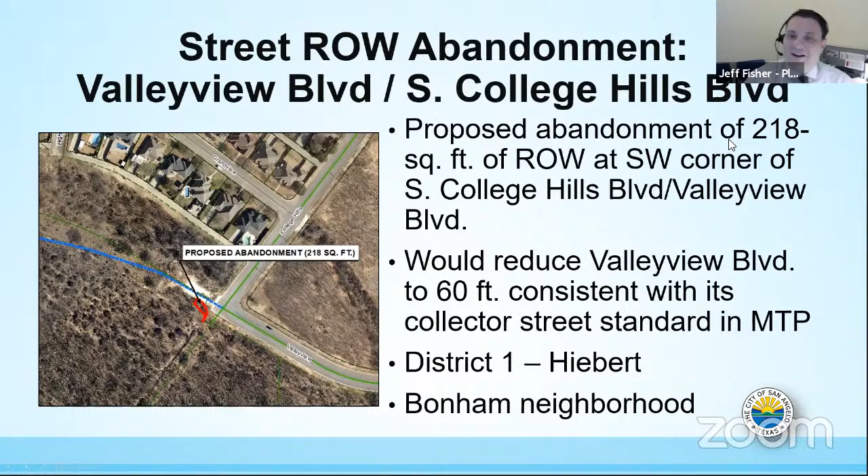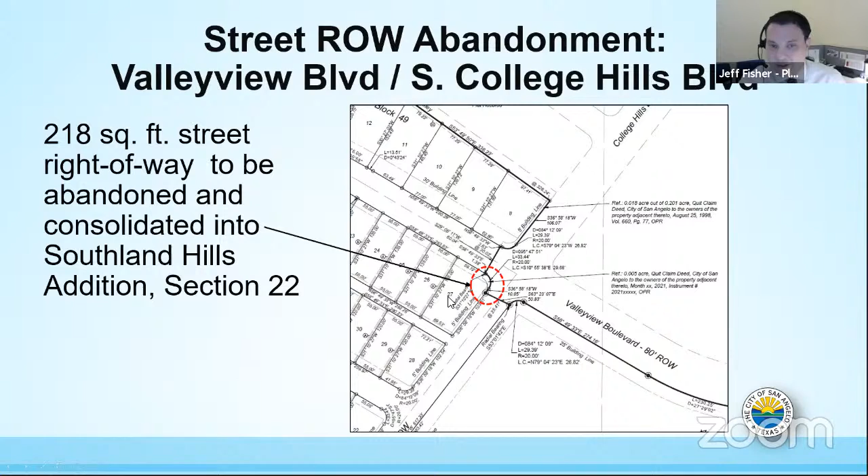We talked about the reason, District 1, Bonham neighborhood. Future land use is neighborhood, zoning is RM1. This is the corner over here to be abandoned, the southwest corner of College Hills and Valleyview. Further to the east is where the plats will be, this is Valleyview east of College Hills Boulevard. Here's a good zoomed-in picture of that plat, the 218 square feet. This would be acquired and merged into lot 27, thereby narrowing the right of way to 60 feet.

Staff is against this, to be consistent with the plat. We want the 80 feet of right of way for the reasons Operations Mr. Kelton had mentioned. Therefore we would recommend denial as submitted based on that. We did circulate to all relevant municipal departments, public and private utility companies, and didn't receive any objections from those utility companies. Again, the only issue is the fact that we wanted Valleyview to stay 80 feet.

And again, for the same reasons, I won't go over this. Operations and Engineering recommended the 80 feet for those reasons. Traffic patterns: Valleyview Boulevard is already 80 feet wide to the west and east. There are no utilities in the right of way, but again, the right of way itself is the issue.

That could lead to a potential community negative impact without acquiring the right of way, because we've got that irregular right of way of 60 feet when everything to the west and east is 80 feet. We believe there'd be a greater public benefit by having that additional right of way. So staff recommends denial of the street right-of-way abandonment of 218 square feet out of the southwest corner of South College Hills Boulevard and Valleyview Boulevard. That concludes the presentation.

I think to make a clarification, we wrote this recommendation and staff report when staff was still recommending the 80. So staff in general is supportive of the 80 feet, but now it's up to you. You've already allowed the plat at 60, and this would be a portion of that. So that's for your discussion beyond this point.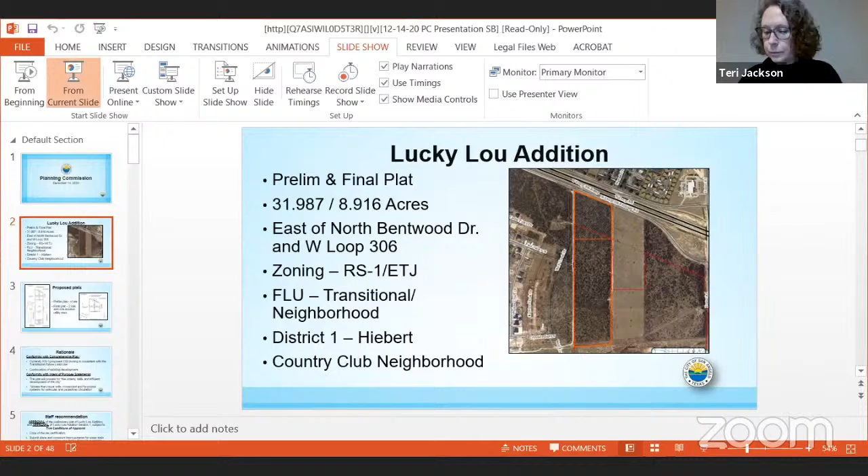Excuse me, Hillary? Yes, I have a question. Yeah, no, sorry to interrupt - Lucky Lou zoning, is that not on this one? No ma'am, or do we have... Yeah, it'll come next month. We have a timeline. Yes, no, I'm sorry, all we're... that's okay, all we're gonna do now is just show them the possible.

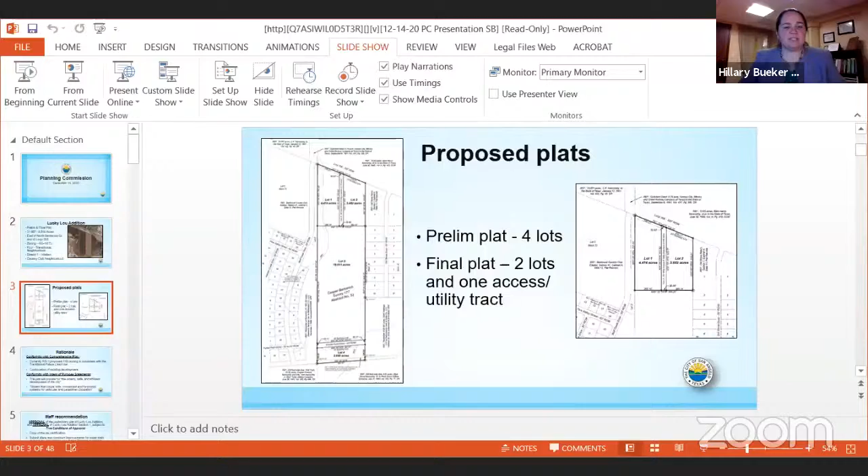So there's actually only a little over an acre that is proposed to come into the city. Again, this goes to city council - we always just like to give you guys a heads up on what's coming, so that way you're aware of it. So part of this, and I think Teri's trying to find her slides, but part of this proposed plat would be outside the city limit. Oh, there it goes. Okay, Teri, you want to continue?

We can't hear you, Teri. I can do it. It's okay, Teri.

So if you can see, there's a red line through the middle of the orange outline. It's approximately a little over an acre. There will be an item going before city council for annexation of that parcel. They're not proposing to annex the rest of it in, just that little triangle.

So this is just to give the planning commission a heads up of what will be going to council. You've already seen the preliminary and final plat, and as Hillary mentioned, you'll see a rezoning at your January meeting. This annexation will go to city council for accepting of the petition tomorrow, then to first reading of the ordinance for annexation in February. Second reading will be the end of March to fall in line with the rezoning. So by the end of March, we should have this property annexed and rezoned to general commercial.

If anyone has any questions, please let us know. It's actually 1.9 acres. I couldn't remember the exact acreage. Okay, so just under 2. Thank you, ladies.